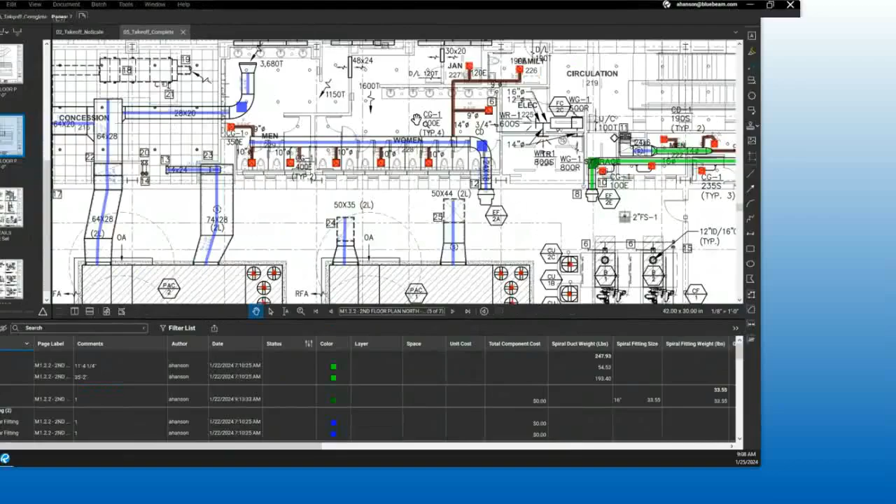Okay, so here is Revu, and this is the final takeoff that we're going to be using today. At a high level, we can see that many custom columns have been set using formulas in order to get weights of different products for our use. We also see a variety of different ductwork since this is an HVAC takeoff. We have rectangular ductwork here, different types for different sizes, also spiral and specialty ductwork. We also are leveraging count tools. We have some diffusers and different types of fans, and we'll go through how to set those up today.

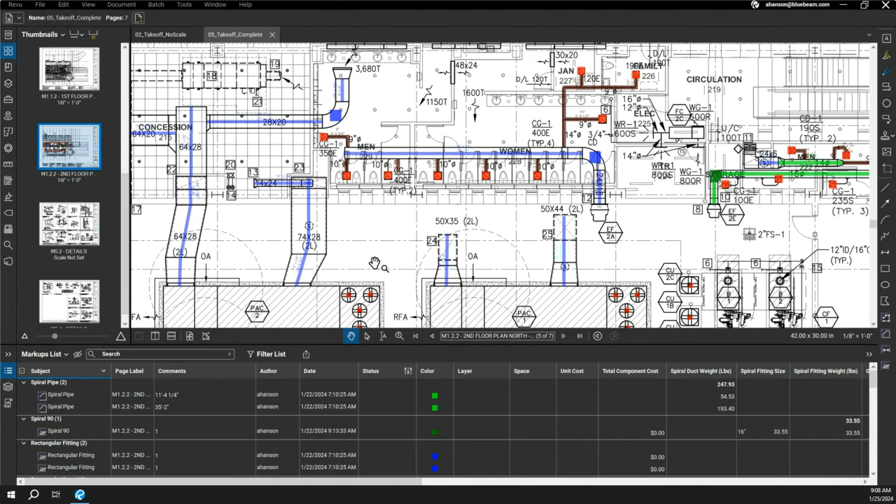So closing out of our final state, I'm going to jump into a blank document that hasn't had its scale set yet. Now I can tell the scale hasn't been set in two different places. Over here, leveraging my thumbnails panel, I can see that scales have been set on some of my documents, but not on the one I have. If you don't see this on your version of Revu next to the thumbnails, there's this little labels button. You can click that and you can toggle the page scale on and off. The other place you can tell that this page has not been set to scale is in the lower right-hand corner, either of which are fine.

Now, before we go through the process of setting the scale, I want to show you a trick that'll help you when snapping things to your PDF itself. If you go up to Tools and go down to Toolbars, I'm going to turn on my status bar.

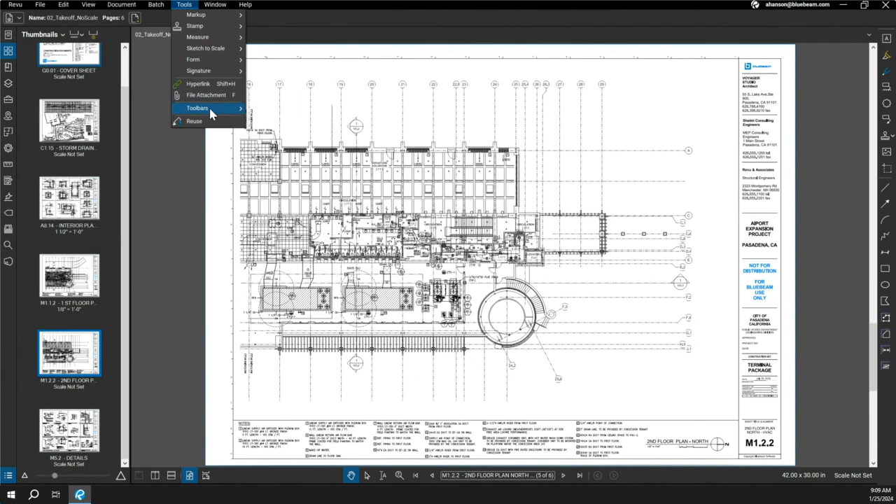The reason I'm turning my status bar on at the very beginning is it's going to allow me to turn on a feature, this third one at the bottom, called Snap to Content. Anytime I click on my content, it'll assure me that I'm snapping to the line that I want instead of clicking close on that PDF.

Now that that's all done, we can set the scale in two different ways. I could select multiple pages over on my left-hand side in the toolbar, right-click and hit Set Scale. Or I can also leverage that piece down in the lower right-hand corner where it says Scale Not Set, click that, and you'll see Apply Scale to Pages pop up.

Here I can choose multiple pages, a page range. I'm going to stick to just this one for right now. And then I have two options here. I have an extensive list of common scales, including metric at the bottom, or I can go over to custom. If I don't have the scale listed in preset, but I know what it is, I can type it in here. I can also use calibrate.

Calibrate is a great way to set a scale if you have a known dimension but don't know the actual scale for the page. It'll prompt you to choose 2 points and then type in the actual dimension, allowing Revu to do the calculations for the scale for you.

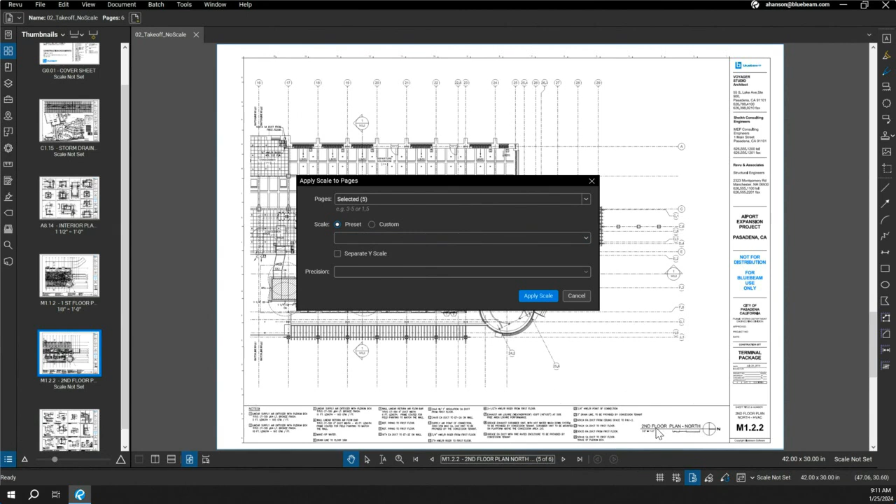So I'm going to go over to preset. Here we can also set a separate Y scale. This would come into play mainly with civil drawings where the horizontal and vertical axis might be different. I can also choose precision. So I know that this page happens to be 1/8 of an inch equals 1 foot, so I'm going to choose that. And I'm going to do this precision, which is really the rounding mechanic, to 1 inch because that'll work for me, and hit apply scale.

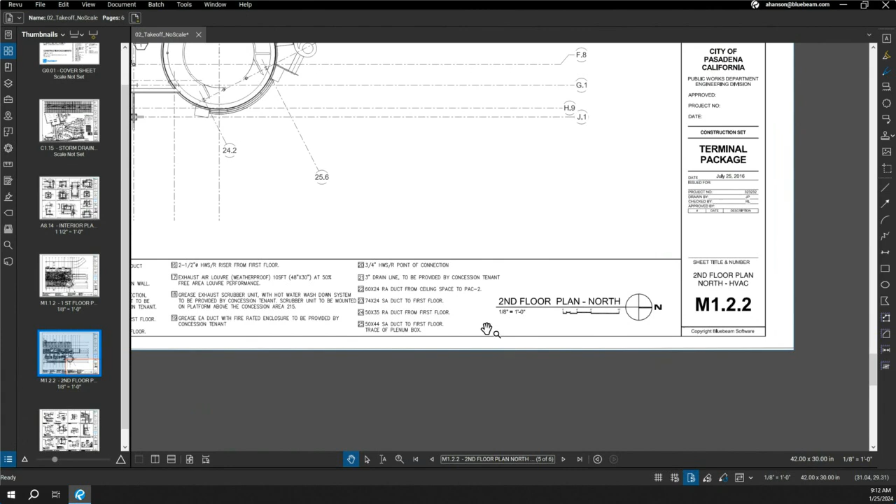So we see that it indeed changed it down here. And because I chose a preset, we always recommend that you verify that. The reason being, although it says the scale on the drawing, this is intended for a particular sheet size. If this page was printed to a sheet size that is larger or smaller and someone clicked scale to fit page, that could not be accurate. Since measurements are so important when doing takeoffs, we want to make sure that's accurate by verifying it.

We can go up to Tools, Measure, and hit Length. I'm going to just come in here, and because I have that snap to content, it'll help me out. I'm going to click this point, come over here. I see that it does show 8 feet, so I know my page is correctly scaled.

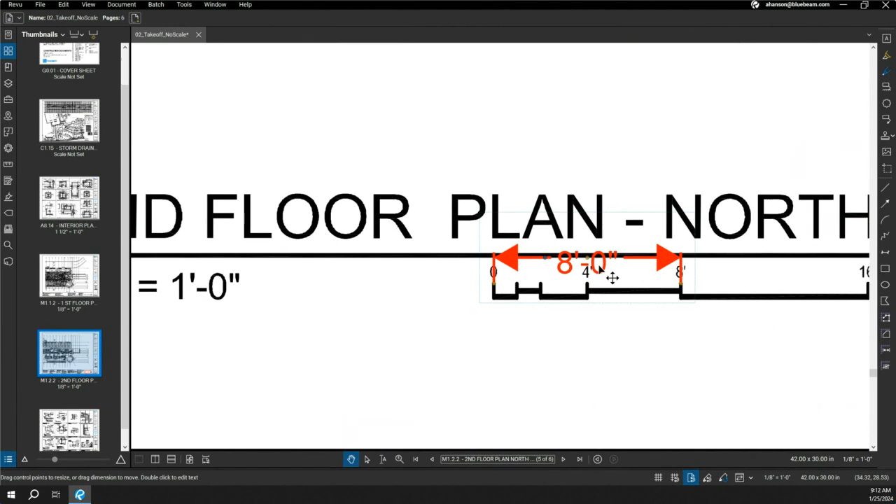So I mentioned viewports. If I have a page similar to this detail document where, yes, the page has been set and it suits the needs of most of these plans, but I have one detail on this plan detail document that is 1 inch equals 1 foot instead of this 1.5 inches equals 1 foot...

So I'm going to use a viewport, which I can access over here in the measurements panel. I'm going to left click to expand that, and hit plus. It's going to ask me to select a region. This is going to be the region that has a separate scale. So I'm going to hit OK, and go ahead and click and drag and release.

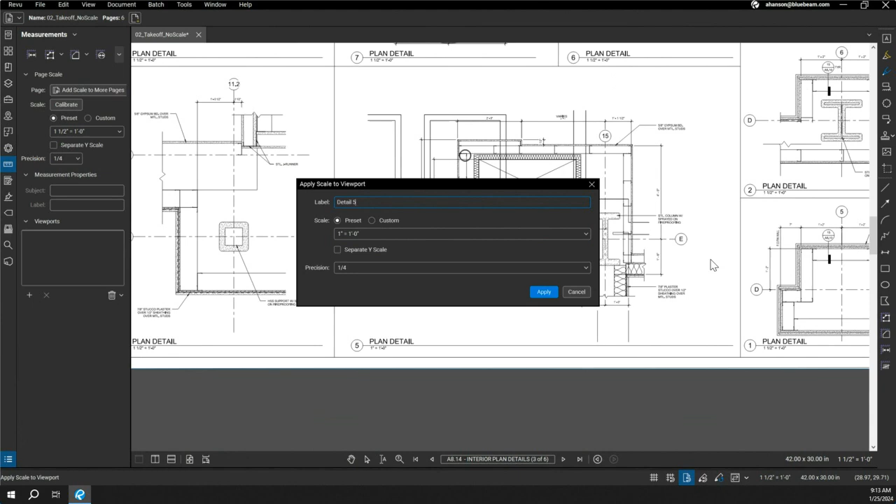Similar to the other scale dialog, I can set my scale. I know that it is going to be 1 inch to 1 foot. I also have the option to type in a title, which I'll make detail 5. This comes in handy because if each of these details had a different scale, it would help me keep track.

So now that I've set that, you can see it in 2 different places. It starts to populate this list of viewports over on the left, as well as turning it blue. In this blue dialog here, we see that it is listed as detail 5, like that label I listed, as well as 1 inch equals 1 foot. Now any measurement I take within this blue area will respect that viewport scale, and any measurement I take outside of that blue area will respect the page scale.

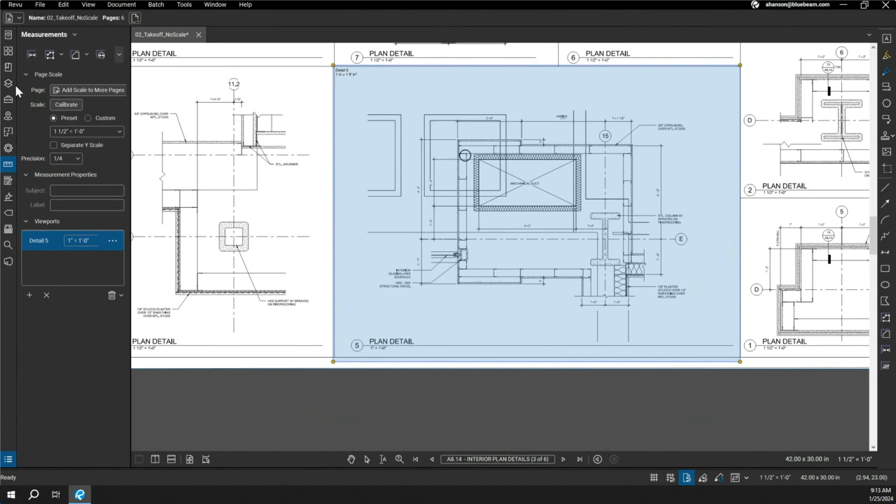So now that I've set my scale, we can jump back into our original sheet and start doing our takeoff. At its very simple start, we can just go ahead and go Tools, Measure, and Length.

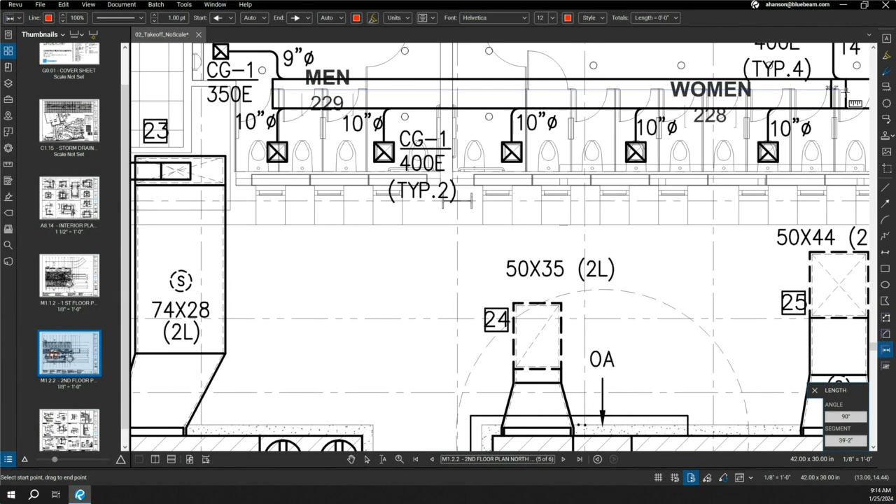I'm going to click in on this duct, and you'll notice my cursor can be moved in any direction. This might be good, but it might be bad in case I'm trying to do a straight line. If I hold down Shift, you'll see my cursor snaps to the closest 45-degree angle, ensuring I'm taking the actual straight line I want. So I'll click that other spot to make my takeoff, and do one more, holding Shift again and reaching to the other line. That gets me started on a takeoff.

However, the real power in estimations in Revu is going to be in building out standardized tools and custom columns so that you can get additional information. All of those custom columns live in the markups list.

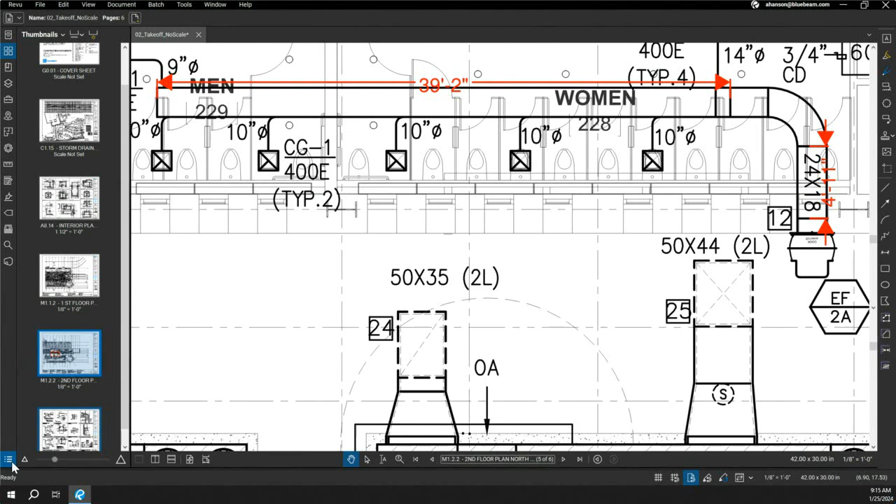If we go to the lower left-hand corner, you'll see an icon with 3 dots and 3 lines. If I click on that, you'll see that the markups I've placed have had their information captured here. We have a handful of built-in columns, such as subject, which is a way you can group your markups for ease of filtering and sorting, as well as page label, comment, which is the actual measurements, author, date, etc. Now, I could just do my estimation with these basic tools, but we want to take it to the next level by making it repeatable.

One of the things I'd like to show you first is the profile. Both custom columns and custom tools live in the profile, so I think it's the best place to start. The profile is really the look and feel of your layout, exposing any tools that are useful for your individual needs. We can find profiles in the upper left-hand corner.

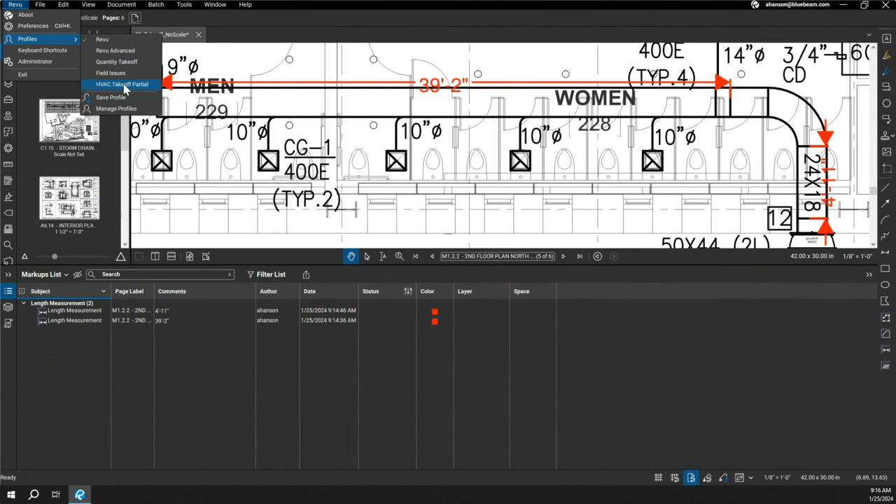If I click on Revu, go to Profiles, you'll see a list here. These first top 4 are built into the software, and you can use them. I have one that I built out, started for today's use. I'm going to jump over to Quantity Takeoff and look at how my interface changes.

It's going to have that markups list at the bottom. I'll pull it up so you can see it a little bit better. You see we have some additional built-in columns that have been shared here. If I built out custom columns, they would be added as well.

Now, the reason this is important: as we can see in this length column, different from the original one, length is going to have a total because it's a measurement style column. We also see area, volume, depth, etc. So we can change all of our columns down here. On the right-hand side, the measurement toolbar has been added for ease of use, and on the left-hand side, that measurement access panel has been pulled out.

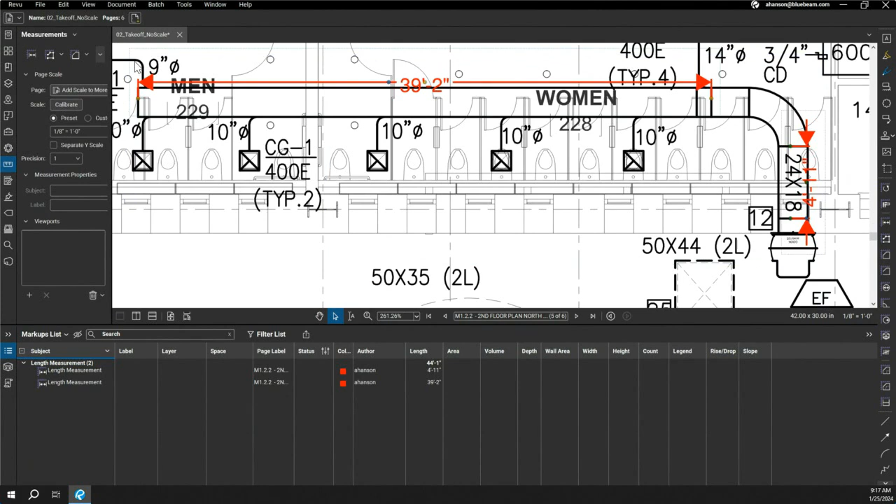Now what I want to do is show you how to set up some columns. I'm going to delete these markups, and we'll start from scratch using that profile I mentioned before. Anytime you build your own profile, you can use the base of one of the built-in ones and start from there.

Here, I cleared out a lot of the columns because in this particular takeoff, we have mostly custom columns that rely on formulas and other metadata. So we're going to build out custom columns here.

The first step is to go to Markups List, Columns, and go to Manage Columns. This is the list of all the built-in options you can choose from, but I'm going to go over to custom columns. What we're going to do is make some tools that are particular to items such as diffusers and fans, and I'm interested in a unit cost and the total cost of those units.

So I'm going to hit Add and make a unit cost column. There are different types of columns you can choose from: checkmark, choice, date, formula, number. We're going to choose number, and under format, I'm going to make it currency. It defaults to dollars, which is okay for me. The next one I'm going to make is total component cost.

Now this total component cost is going to be a formula. You'll see that once I choose formula, I get an expression bar. Here I can just start typing and it'll give me some prompts as to what I want. I mentioned I wanted a count, so I'm going to start typing count. It gives me this list. I just double click and it will add it to my expression.

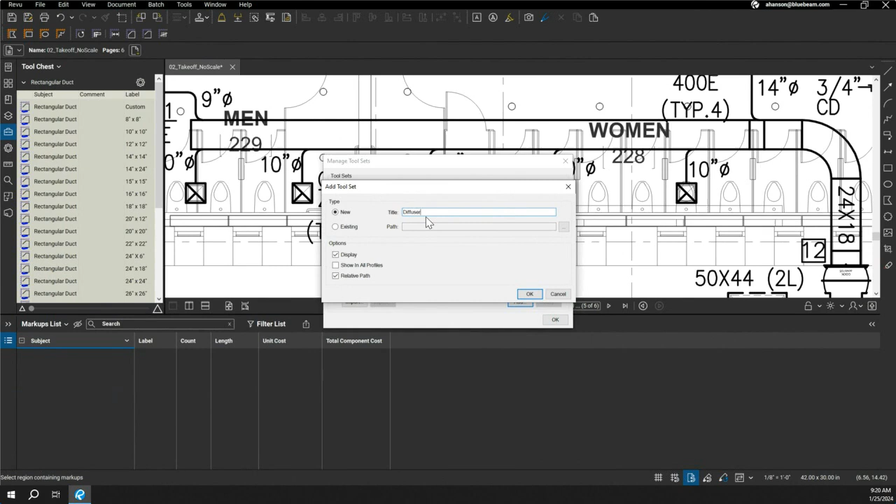The first step is to go ahead and click on that tool chest and go down to Manage Tool Sets. I'm going to go ahead and hit Add, and I'm going to call it Diffusers and Fans, and hit OK. It's going to go ahead and prompt me a place to save it. The standard default location is fine by me, but you can choose a different location if you want.

And I'm going to select this and just go ahead and toggle this up so that it is at the top of my tool chest for you to see it easily. Going to hit OK, and now that I have my custom column and my tool chest set up, the next thing we want to do is build those markups.

So I mentioned I wanted to use a count. I can either use it from this toolbar that I have here, or I can go up to Tools, Measure, and hit Count. I'm going to just place it on my drawing and escape out. So we see it has been added down here, and what I want to do is select it.

It turns blue, and I'm going to change the properties to suit my needs. So when selected, the Properties panel comes up here, the Properties toolbar. It is dynamic, meaning depending on what type of markup I have selected, these options will change.

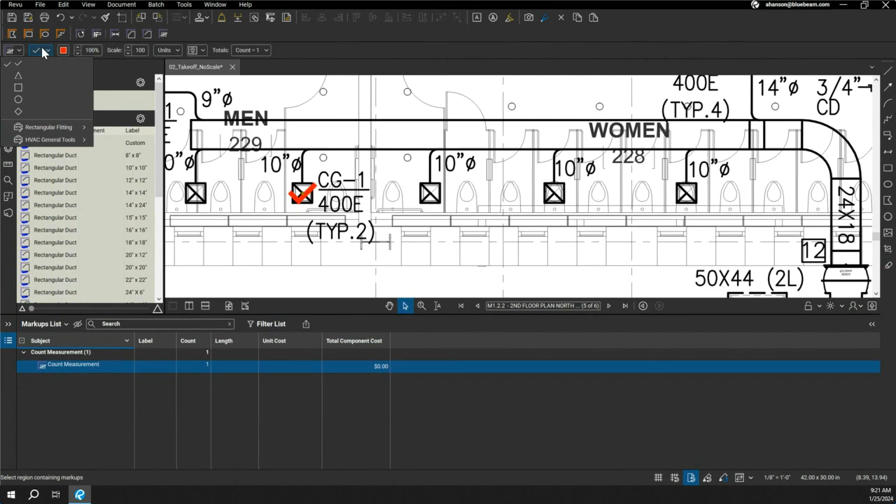With a count, I can go ahead and change the style. I want to change the opacity so it's not quite as bold, and I'm also going to change the size so it's a little bit smaller.

Another thing I can change here are subject, label, and layer. I'm not going to change this here. I'm going to do that in the markups list because we have a couple other items we want to add. So in addition to changing custom column information here, all of these items can be found in the properties panel if you so wish. I think this is a little bit easier for our purposes, so we're going to do that down here in the markups list.

So to change the subject, so I kind of group them together, I just double click and highlight, and I'm going to make this diffuser style 1, and I'm going to give it a unit cost. We're going to make this $27, and you see it go ahead and will multiply over into the total component cost.

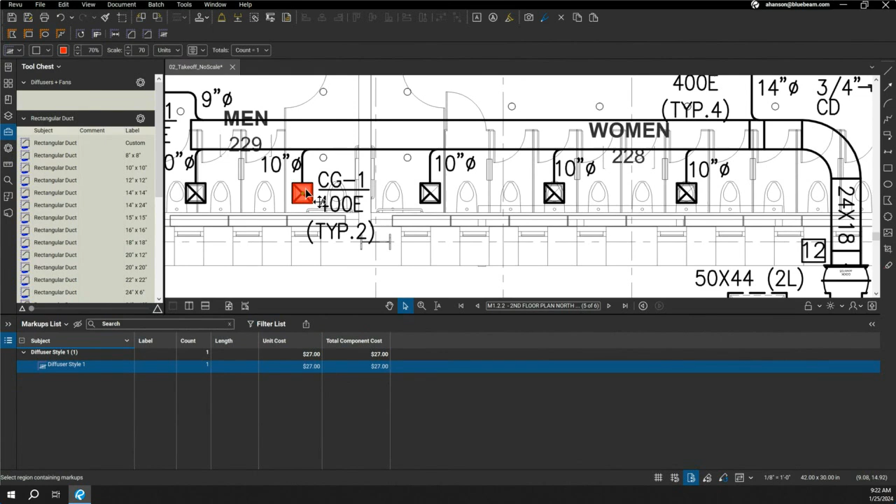Since I've built out my first tool, I'm going to use that as the base of my other tools. I'll select it when it's highlighted, hit Control C to copy it, click aside, hit Control V, and I get a second tool.

Here I'm going to double click in, and I'm going to make this diffuser style 2. Now that I have diffuser style 2, I'm going to double click and change the price to $39. So I want to build out some fans.

I'm going to click that first one, hit Control C, click out, Control V, and instead of just changing the price, I also want to go up to this properties toolbar here and change the look. I'll make it a triangle. I will come down here, take out diffuser, type fan, and change the price accordingly. We will make this one $34, and I'll make one more fan.

I'll select that, Control C, click, Control V, and I will make this fan style 2. And I will change this price as well.

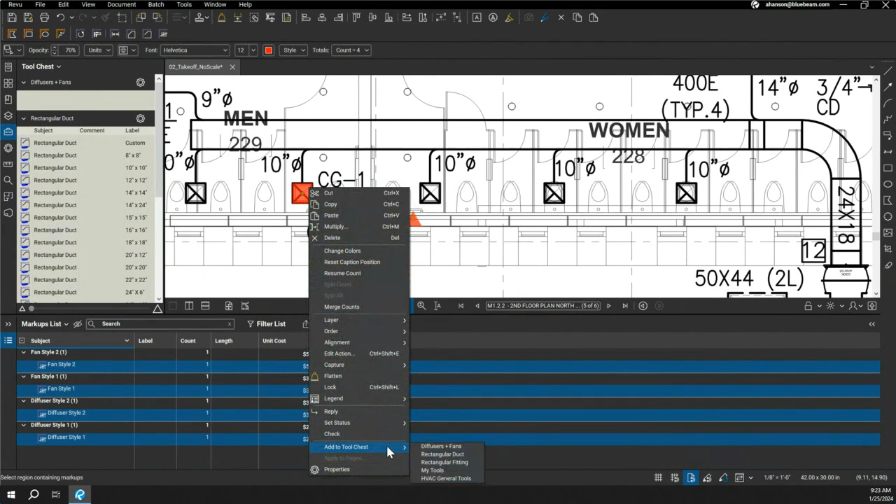Now that I have the tools that I want ready to go, all I have to do is click and drag to select them all, and right click on one of them to add to tool chest. Because I already took the time to set up my tool set, I can choose that diffusers and fans, and it automatically adds them up here.

Now, I just use this sheet as a way to build these out, so I can go ahead and delete those. And then as I place from here, I can just go ahead and do my takeoff.

Now, although these symbols are here and when I hover it will show me the subject information, it's a little bit more difficult to navigate. So if I go to the settings and click and choose detail, I can see that more grid option where it says subject, and if I had established a label, it would show there.

Now, in order to have these for repeat use in the future and share with my team, I want to do a couple things to save. I'm going to go up to settings and hit save, which will just save the work I've done to make sure it's fine. And lastly, go to Revu and profiles, and I'm going to go ahead and hit save profile.

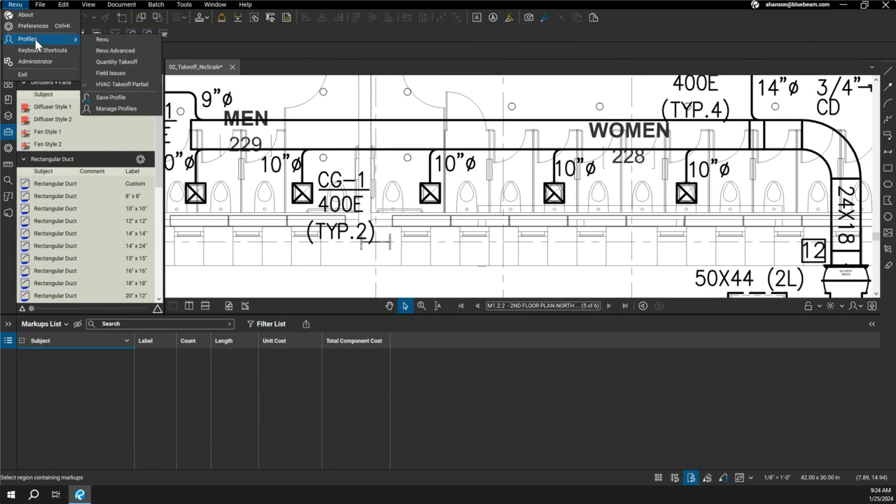And if I want to share that profile with my team, I can go to manage profiles, click on the profile I want, and export. Before you export, you want to make sure you have that include dependencies checked. That'll pull in all of the custom column information and your tools so that there's a single file that your team will have to download to benefit from all of the work you've put in today.

Now that we've gone through a little bit of setup, I'm going to hand it back over to David to talk about those poll results.

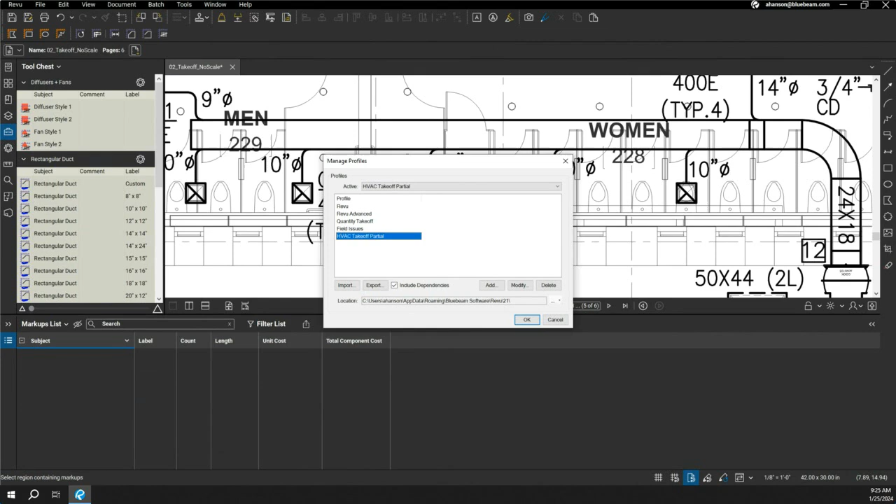Great, thanks very much, Ash. I love the tool chest personally, I used it a lot in my previous role. So for those of you out there, as Ash said, if you're working on a team, the tool chest is a great way for you guys to have consistency in your work and also be able to present a kind of professional estimate internally, but also to clients. So yeah, thanks again for going through that, Ash.

Before we go over to Harry, we did have a poll that popped up at the beginning when you first came into the webinar, so we want to take a minute right now and look at the results. The question we asked was, which Bluebeam Revu features do you rely upon for your takeoff process? You can see the results up here: customized measurement tools at 83.8%, Legends 32%, Studio Sessions 15%, Custom Columns 18%.

So Harry, you're up next. I wanted to ask you, when you see these poll results, is there anything that surprises you, jumps out at you?

I think the use of custom columns only being less than 20% surprises me. These are really powerful tools that are going to help you leverage either your takeoffs in Revu or when you export out to something like Excel. So that's small—it just means data is clearly a big deal when it comes to bids and takeoffs. That's at least what sticks out to me. Yeah, and I was struck by it too. It's cool to see some people using Studio Sessions.

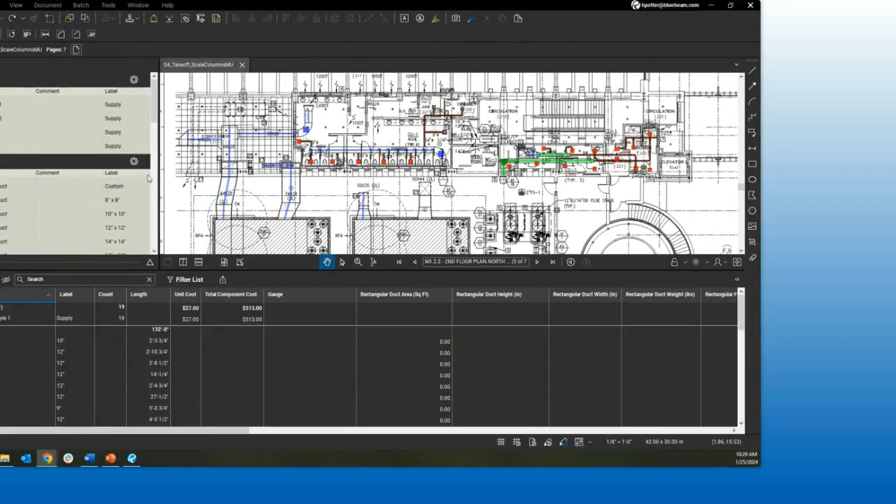This is going to be the same drawing that Ash had, and we're going to hit the ground running, taking a look at the markups list. So Ash talked about how we can build that out, how we can create those custom columns. And the custom columns here are really designed for two different uses.

So we have some custom columns here that Ash showed setting up that provide a unit cost and a component cost, and effectively allow us to calculate with our measurements. Revu is behaving a little incorrectly today - it's my mouse, back on track. So we have our unit cost multiplied by the number of count items to create a total cost for physical units.

But some of this other ductwork here is really being used and calculated with some of these more complex custom columns to calculate duct weight. And this requires columns that are going to have some rough calculations and approximations, as well as multiplying by formulas to calculate the ultimate weight of custom-made ducts.

Now, ultimately, you may not be involved in the HVAC world at all, but you're likely going to have various different processes that you're working with to calculate things. It could be calculating overage when looking at square footage of carpet. You could be factoring in labor, or factoring in waste of material when working with baseboards. Each of these is going to require different formulas and calculations, and the markups list is going to allow us to do that.

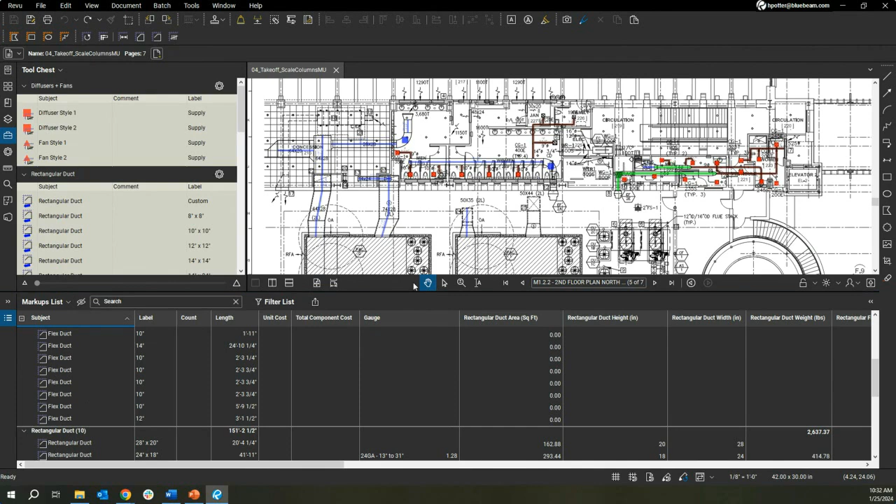So I'm going to finish up placing another one of these duct items right here. This is going to be a 50 by 44 rectangular duct. I'm just going to click on this in my tool chest.

When using my measurement tools in Revu, the nice thing is that a lot of the different measurement tools, be it poly length, area, or volume, operate in very similar ways. All of them have this little blue box on my cursor that's snapping to content, which makes it easier to draw.

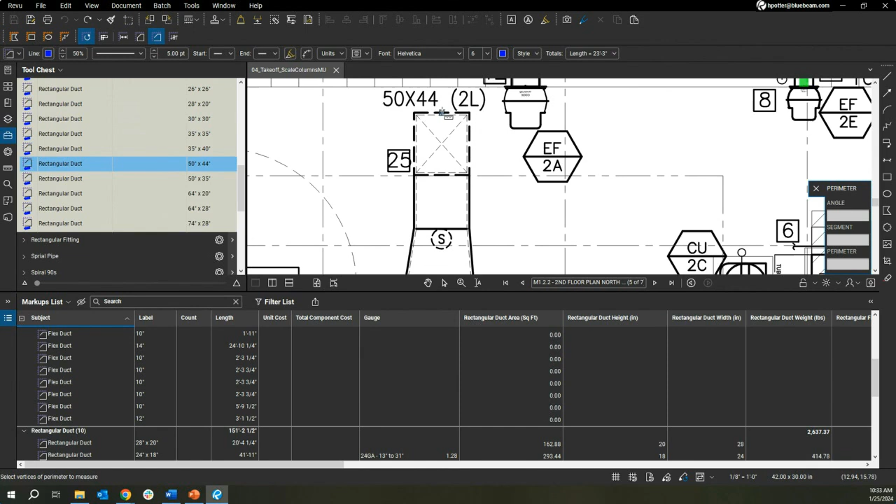So to place this length measurement, in this case the poly length, if I wanted to measure changes in this duct, I could.

I'm just going to click, and then place my click down here at the bottom to measure this. Little trick though, if I hold down my shift key, it locks me into orthogonal directions, letting me draw a nice clean straight line. Then I click at the end. It's going to prompt me to keep placing line segments, but since this is a nice straight one, I can just hit enter and end this.

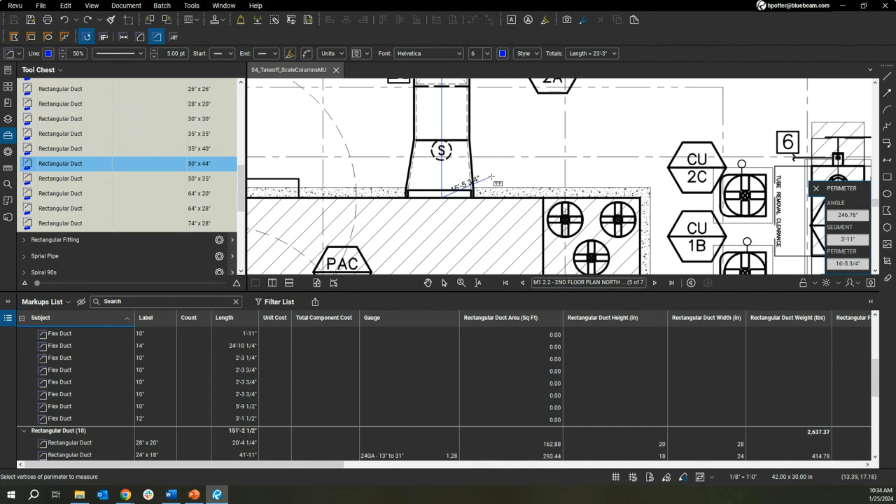A little trick for you: if you end up accidentally placing multiple line segments that you don't need—this could be calculating anything from ductwork to egress—just hit your backspace key and it will remove that line segment. Then I'll hit enter, and now we have this calculation right here.

And we'll notice it pops up on my markups list. It's going to take the length I drew on my drawing and use the calculations, this approximation of gauge, taking my square footage and multiplying and calculating with my height and width to give me this duct weight.

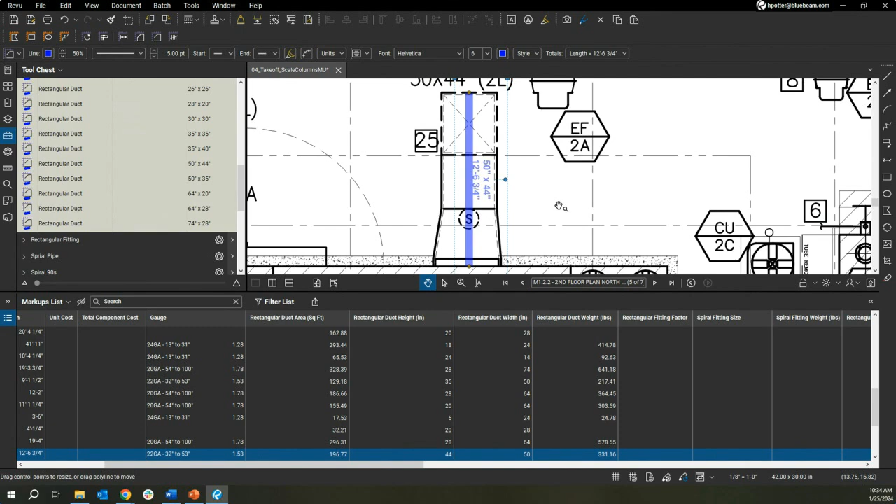And again, we can keep using this as we're calculating and measuring different ductwork here to ultimately get a total weight of all the ductwork, which we'll use to create the bid sheet at the end. I'll showcase that data and that export in just a little bit.

So that is our quick length measurement tool there. But what if I want to count some items here?

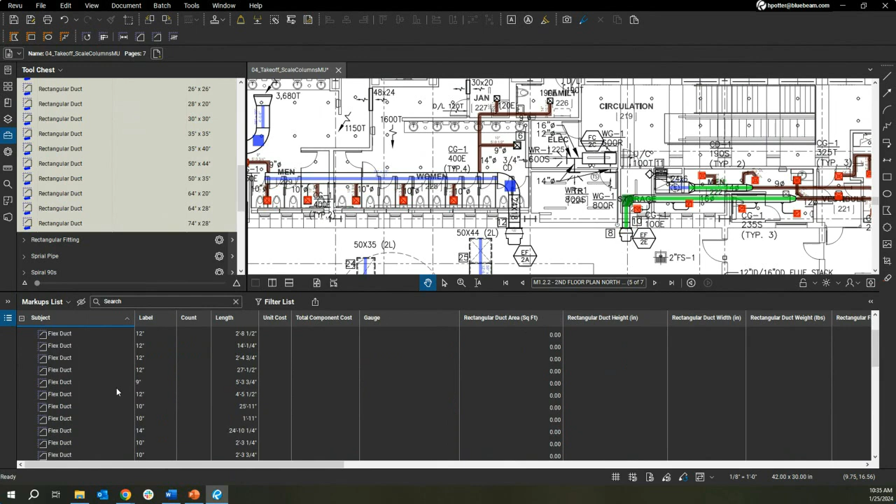So Ash showed these diffusers, and what if I already have some counted here but I realize I've missed a few right here. Now, if I want to continue a count measurement, it can be tempting to just grab the tool from my tool chest and keep using it. But the nice thing with a count measurement is it's one line item.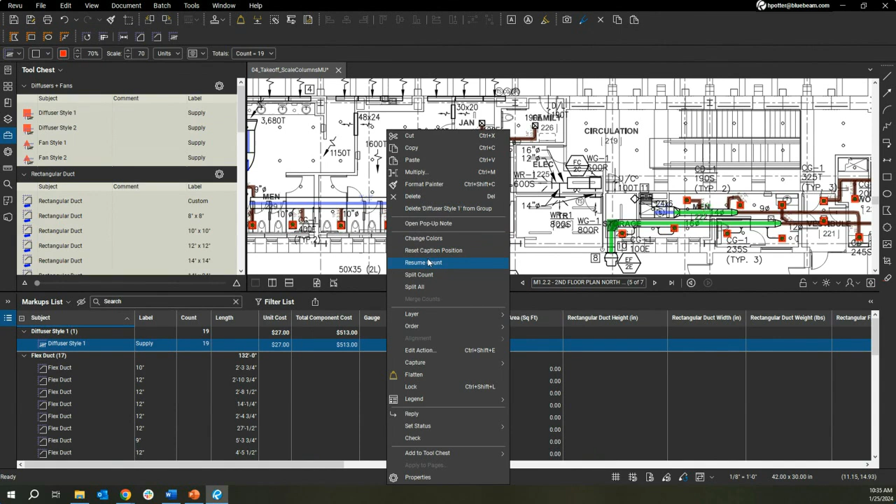So it keeps my markups list nice and clean with one line item. If you want to continue a count you've already started, it's really easy—just right click on an existing item, and right towards the middle we have this resume count option. I can grab resume count and continue that count from here.

So I can just come in and click those items that I want. And if you keep an eye on this, when I'm done, it updates my count and updates my total cost accordingly. So that's all well and good—I had a couple quick items that I wanted to count right there.

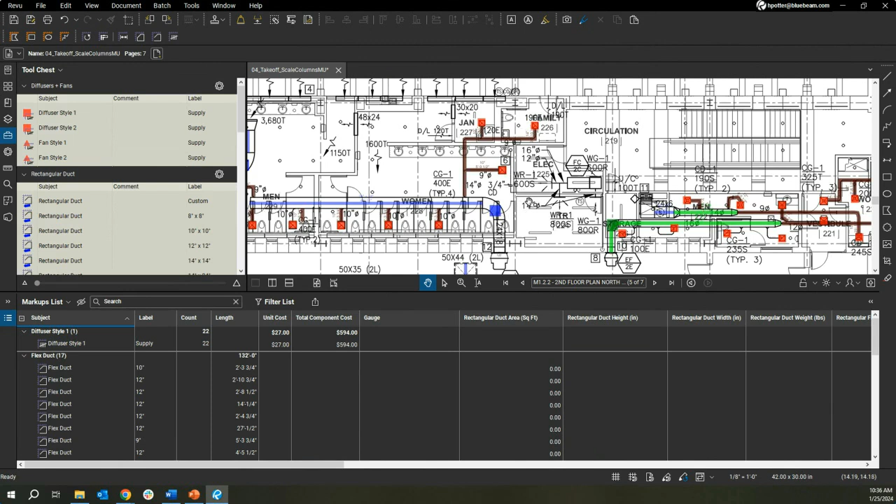But what if I have something like these two different fan items on my drawing? Again, you may not be dealing with fans or ductwork, but we see this everywhere, from electrical boxes to interior doors—counting is a big deal in takeoffs. If you're dealing with one sheet, that's one thing, but if you're dealing with an entire building, that can be hundreds or thousands of items.

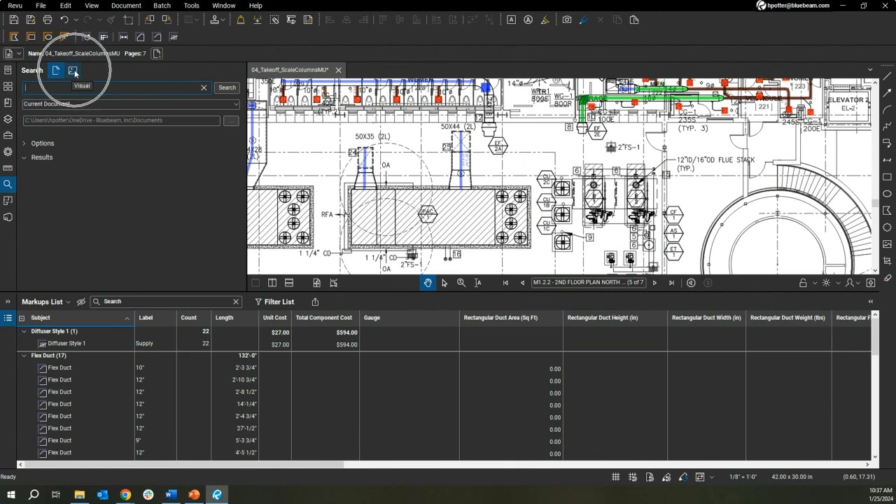So how do we make this work a little bit more efficiently for us? The nice thing is we have a tool called Visual Search. Now, Visual Search is in here in this search panel, the little magnifying glass right over here. Some of you may have seen that you can do a text-based search, which is awesome. But we can take it a step further with Visual Search right here.

What Visual Search allows us to do is click on this Get Rectangle and define what we're looking for. Then it's going to search everywhere in the defined location for us and be able to do it really nicely, quick and efficient. So let's start with this fan type right over here.

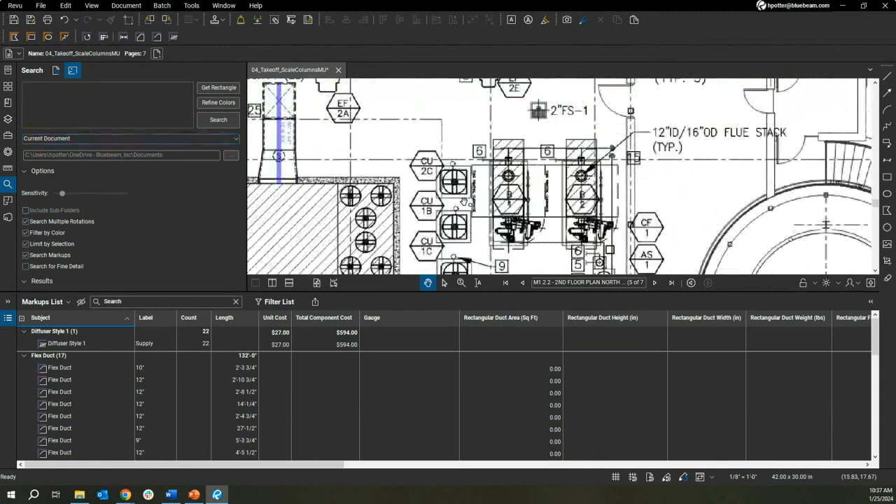The first thing I'm going to do is click on my Get Rectangle, and it's going to turn my cursor into a little crosshair. So I'm just going to click and drag right here over that icon. We're going to see it gives me this image here, sort of a preview of what I'm searching for.

I can then define where I'm looking. The default is going to be the current document. I'm going to stick to just this page right here because I know there's only these fans on this page. But if we wanted to look at an entire document or even an entire folder, we could do so right here.

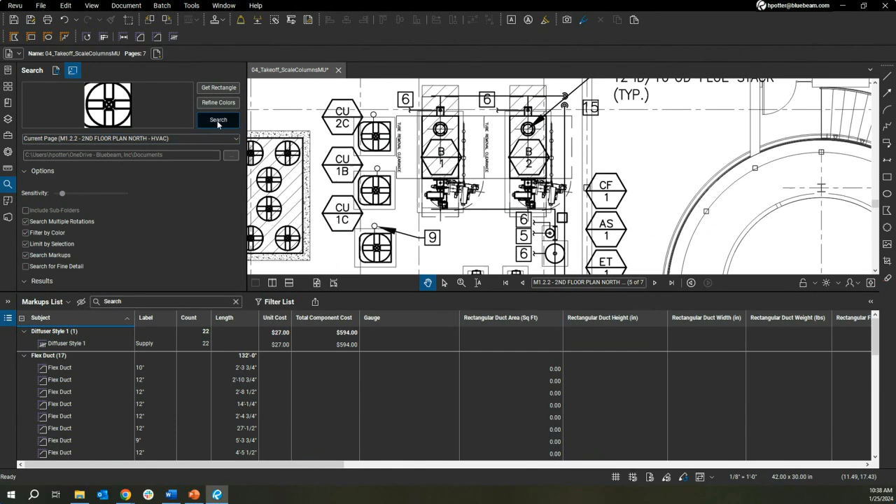I then have some options for fine-tuning my search here, but we're just going to search and take a peek at this. We're going to see it's searching here, and we're going to see it found 3 items.

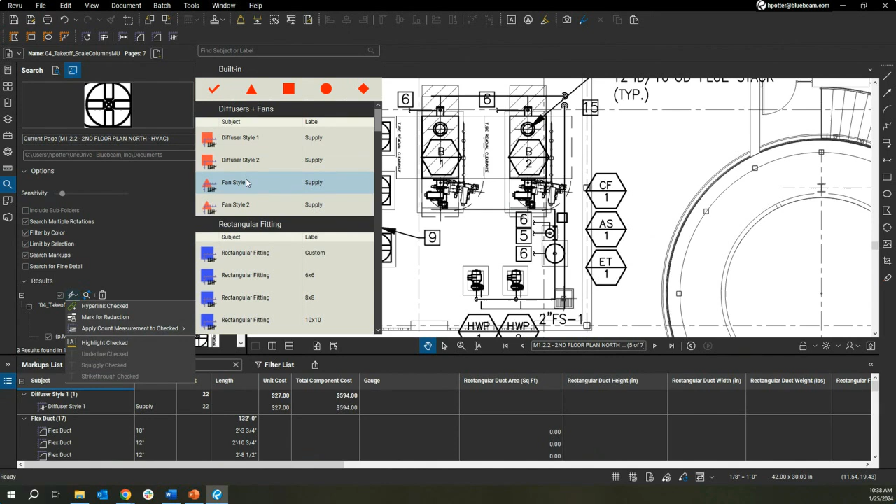So what I can do nice, quickly, and easily is click on this Select All, and then click on this My Options for this checkbox, I can come in and apply a count measurement to checked. You'll notice I can use some of the default count measurements, but I've already created these, set up for me, ready to go. So I already have data associated with these that were created.

So I can just click on this fan style 1 that I have, and we're going to see it populates in my markups list with that count and the unit cost and the total cost already built out. So if I have the tools already set up, I can quickly and easily use Visual Search to count these items and create the calculations for me.

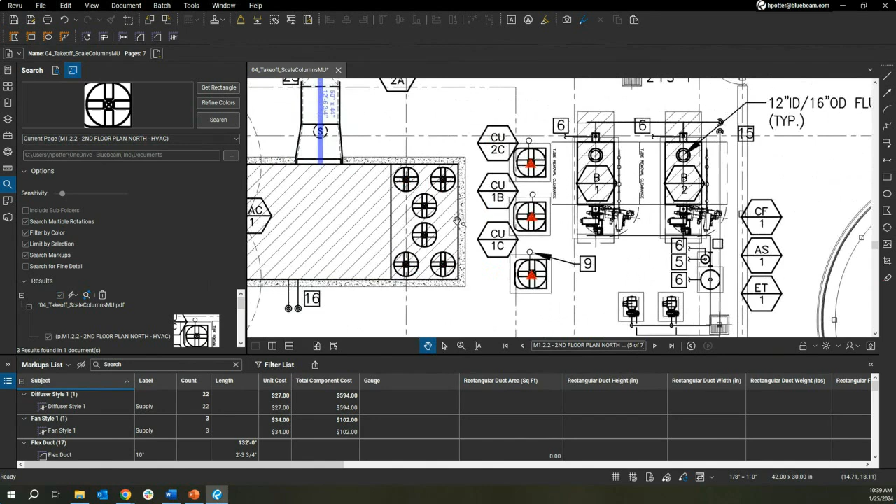Carrying through, I'm going to do that one more time for you. Again, I'm going to search the second fan type. I'm going to go to Get Rectangle again, click and drag around that icon, and search here as well. It's going to search the parameters and find what we're looking for. And I can select all of these items and apply that fan style 2 right there.

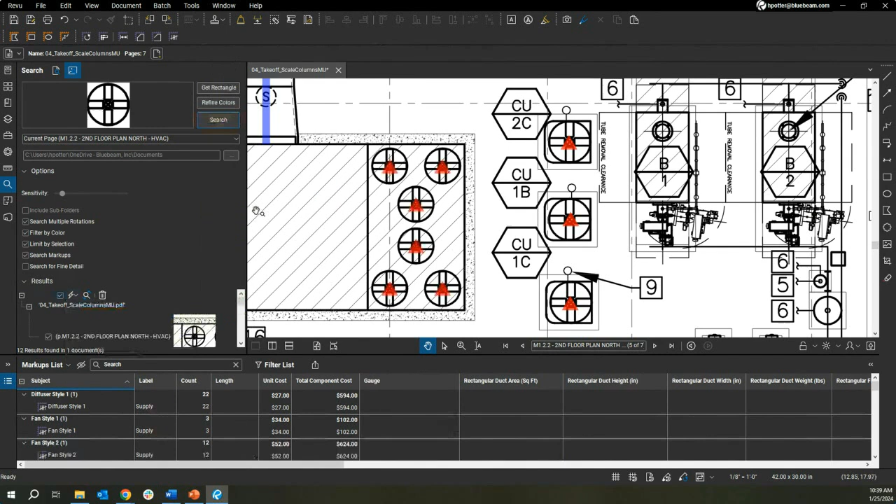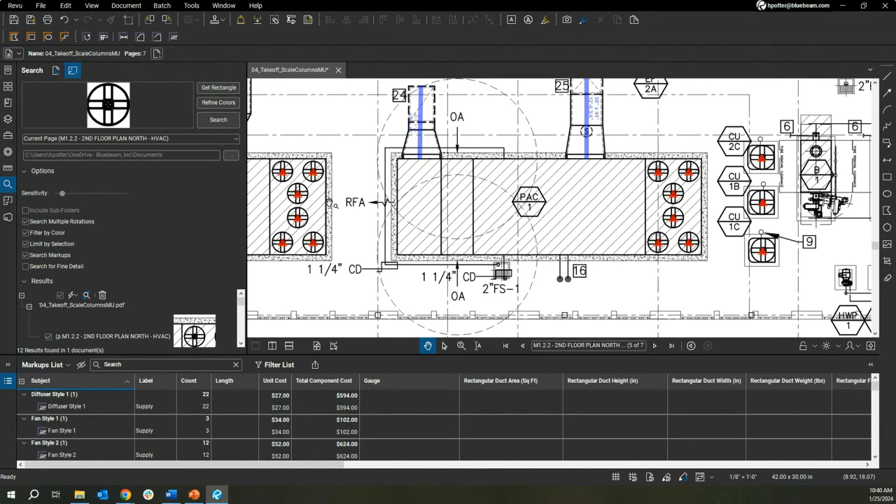We're going to see it counts them for me, and it even counts ones I wasn't even looking at the time. Now, one thing I do like to note, if you're doing the Visual Search, what can be most helpful is to ensure that you check anything that's done automatically in the software manually, and this is going to depend a little bit on the quality of the drawings you have. So the better the quality of the drawing, the more accurate the visual search is going to be. It might require a little bit of fine tuning here, but it allows you to really quickly and easily count items very quickly across a wide range of drawings. It can save you a nice amount of time.

So I have a number of lengths, counts, items here on my drawing, and I have my markups list built out. But as we saw in the poll, a lot of you are using legends, but it was still only about 30% of you. So what are legends and how can they help us?

Well, legends are really a nice, quick visual way to see ongoing totals and data from your drawing. The markups list is awesome, it's powerful, it has a ton of data in here, but unfortunately it can get a little convoluted, particularly if you have a lot of these built out custom columns like I have here. And if you notice, a lot of the measurements that I have here, they don't fill up every column, they just fill up a few certain ones. So it'd be great if we had a nice visual way to see this on the drawing that would give us also rolling totals.

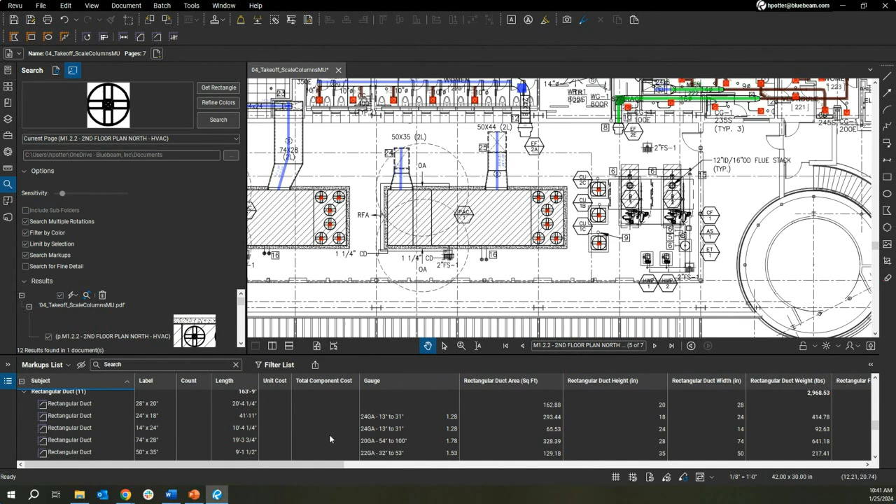And legends can do exactly that. So I'm going to come up here, a bit away from what else is on the drawing, and create a legend and show you how that works.

Now we have two different ways to create a legend on the drawing. We can either create a legend from individual tools, so I can right click on a particular tool and go to legend and create new legend. But the nice thing is if we have a tool set set up, it's actually even better to create them from a tool set. So if I click on this little gear icon next to a particular tool set, I can go down here to legend and go to this create new legend.

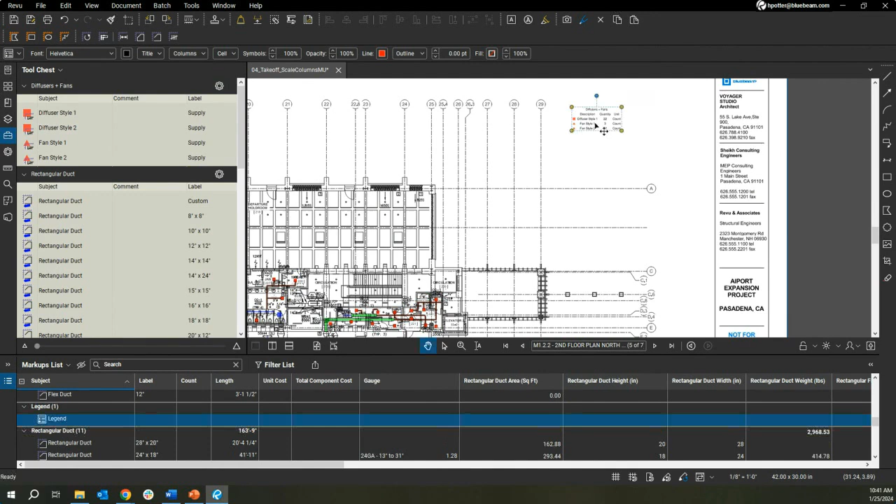Now click on create new legend and we're going to see it populates that for me and I can just place that on my drawing. So this legend, the nice thing with creating it from the tool set is it already gives me the name of it, the name from the tool set itself. And it gives me a description, a quantity, and what the unit of that particular item is.

Now I could create two separate legends here. So I can create a new one with these rectangular ductwork if I wanted to have two different items. Or instead, I could add this to the existing legend and have one built out legend here. And I can easily just delete that extra one that I don't need anymore because I have all of the data that I want in one legend.

And if I were to come in and add more items, say for example a few more diffusers here, in the middle, it updates that count there for me. And I might have multiple different line items in my markups list, but it gives me the nice total of all this right here in the legend.

Now I can also change a lot of the properties of this legend as well. So I can come in here and change which page this is sourcing from. The default will be just the current page, but I could have it grabbing data from the entire document. I can come over and change the title here. So right now it's diffusers and fans, but I could call this instead HVAC Takeoff, and it's going to update that for me. I can pick which columns this is taking into account.

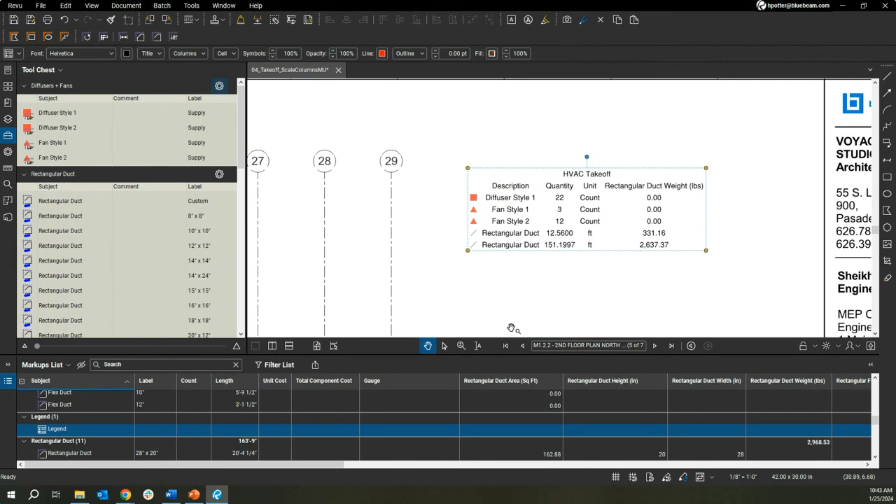So I could include, for example, the total rectangular duct weight, and I could see that for each of my rectangular ducts. Maybe I want to see the different types of rectangular ducts that I have here, so maybe I want to include label as well, so I can include that. And we're going to see, instead of just seeing the two different types of rectangular ducts I had, now it splits it out and shows me each different type of that rectangular ductwork. So I have a lot of flexibility in terms of how I am seeing the data in this legend.

And again, this sort of gives me a nice visual indicator as I'm building this takeoff up, what that looks like. So the legend is one type of data output, but ultimately we want to use this to create a bid. So how do we take this information from our drawing and put it in a place that's easy to calculate, take into account those costs, and ultimately create a bid sheet at the end?

Well, in our markups list, right down here at the bottom, we have this summary button. Now we have four different types of summaries here, but the one we're going to focus on today is CSV summary. This is going to allow us to take our data and create an Excel file from there nicely, quickly, and easily. So I'm going to click on this CSV summary button right here. We're going to see it's going to pop open this summary dialog right here, and there's a lot of flexibility we have.

So under columns, this allows us to pick which columns we want included in our summary. And by default, it's going to have all of the columns that we currently have turned on, and I can toggle them on and off by clicking on that checkbox. I can also filter and sort certain things. So maybe I want to create a bid sheet of exclusively fan styles or just particular ductwork. I can filter and sort items within there.

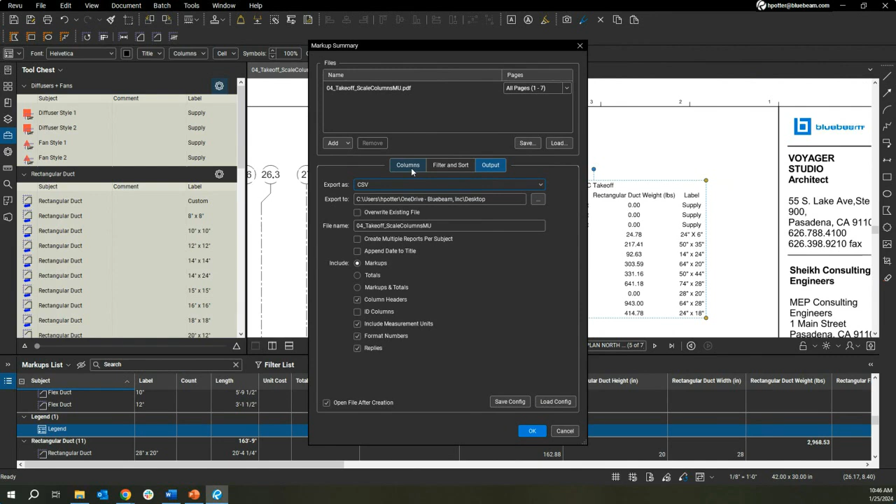Now, the nice thing here in the markup summary is once I find myself regularly doing certain bids, that's going to be really common. If you're working on, for example, this HVAC takeoff, it's going to be a pretty similar output every time. The calculation is going to be different, the plans are going to be different, but the outputs are going to be similar. What I can do is tweak the columns and the filtering that I like, tweak the naming, and create a configuration file.

So I don't need to mess with this every time. Instead, I can just load a configuration like I've created here. It has all sorts of columns turned on and off and tweaked as I like. And I can hit OK, and it's going to spin up an Excel file for me.

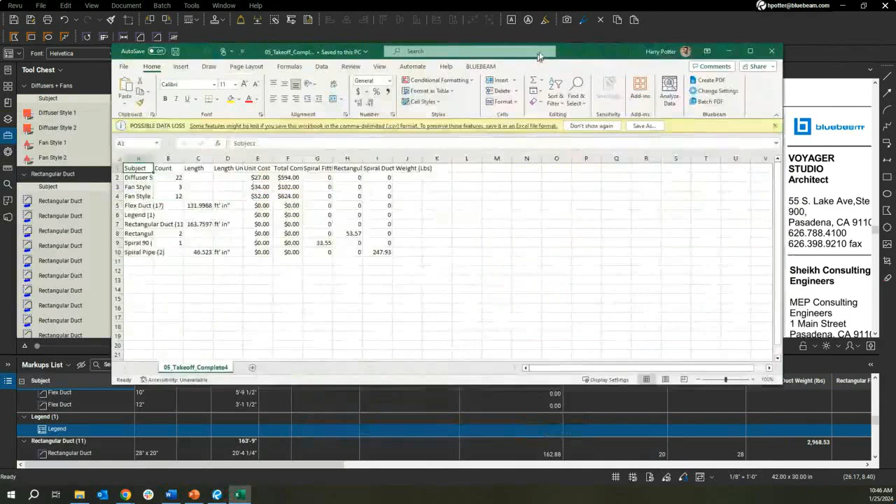And I can then take this file that's going to get built out in Excel, and I can take the data. Let me just pull this over for you. I can include some extra calculations, some price calculations using the weights and such like that, and output that there.

One little trick in Excel before we finish up, if I want to quickly and easily see all the data here, because right now it's a little shrunk. I highlight everything, double click there, and we can see all this information.

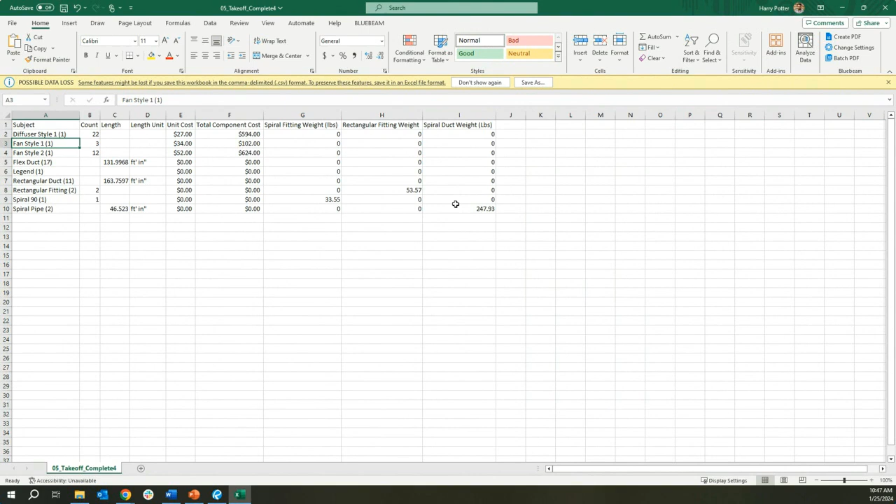I can see the counts, the cost of these particular items, and I can see the weights here that I can then use to create an ultimate calculation in Excel, creating a total using calculations from both Revu and Excel, to ultimately create that finalized bid sheet that I can submit and hopefully win that project.

So that was a quick crash course, but we hope that you were able to take away some really useful items and some really awesome insights here as well.

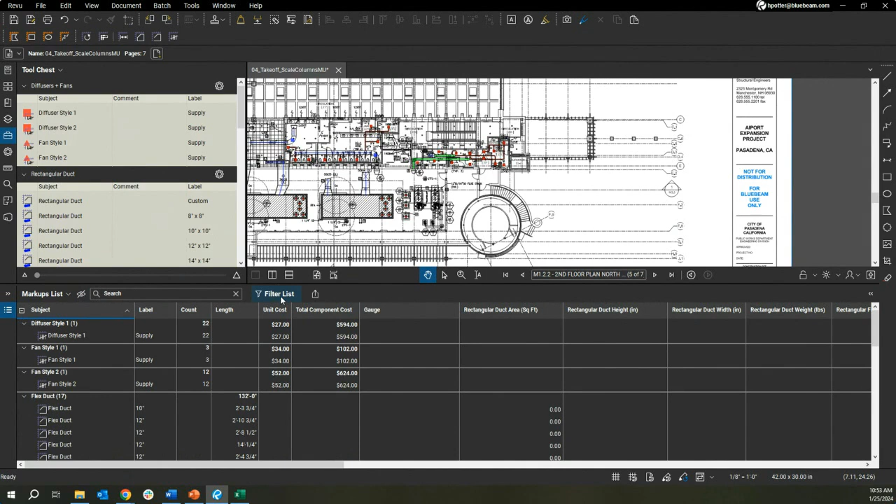Yeah, this is a great question, David, and one that does come up a bunch. The nice thing is we do have a couple different ways to do that. If I come down to my markups list, this little eye icon right here is going to allow me to hide all my markups. It's going to clear the markups out from my drawing and from my markups list, and hide them away. Another way, if I want to just ignore certain items, I have this filter list. Maybe I want to hide everything but a particular type of markup. Same thing, I can filter out everything but certain items, or hide them all except for one item. So the markups list is going to be your lifeline for doing that.

Great, Harry. And while you stopped sharing your screen, I was like, that's a great opportunity to answer another question here. We had a couple of questions about measuring arcs or irregular shapes. What's the best way to do that? I'm picturing someone maybe measuring a curved line and clicking about 100 times along that semicircle. Are there easier ways to do that?

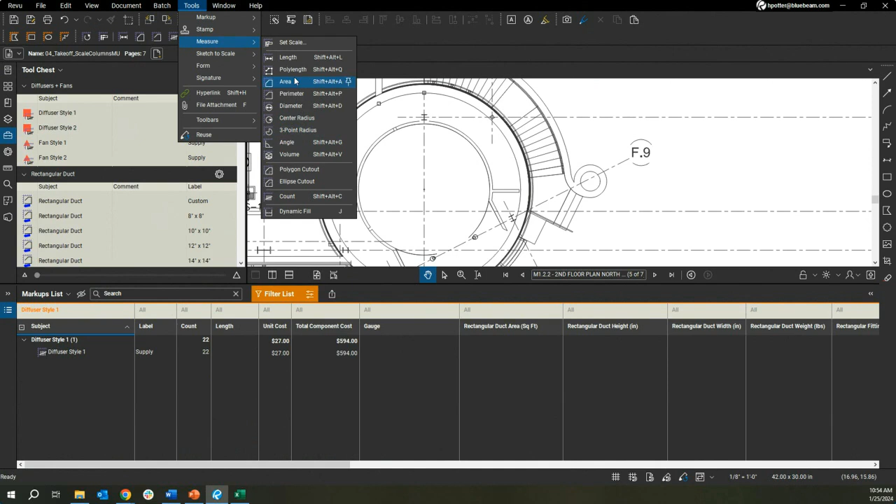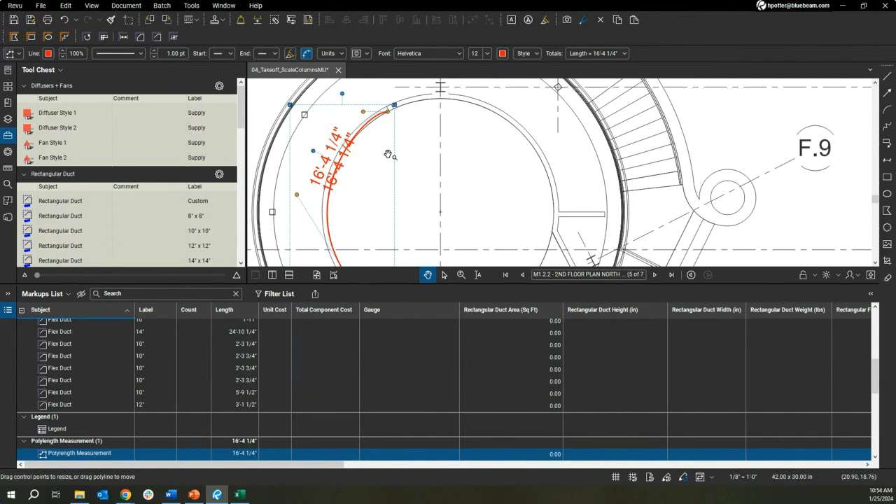So there's a couple different ways, let me pop back and we can show that. I have some curves here as well, so we have a couple different ways to do that. If I want to just measure the quick arc length here, up in Tools and Measure. If we have a nice circle, we can use this 3-point radius tool. But if we have an arc that's not super great, we can use our poly length tool, and basically adjust this, convert to arc, pop this out, and match that from there. That's one way. It's a little clunky, but it can get the job done in terms of measuring those arcs.

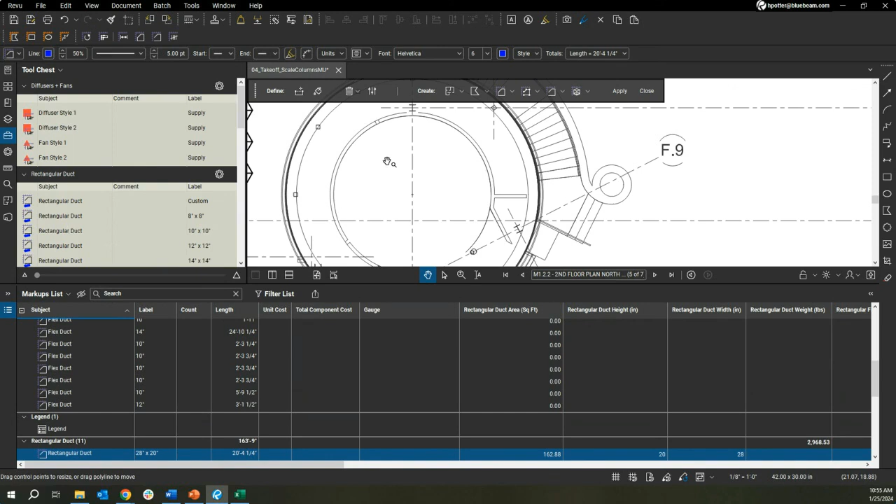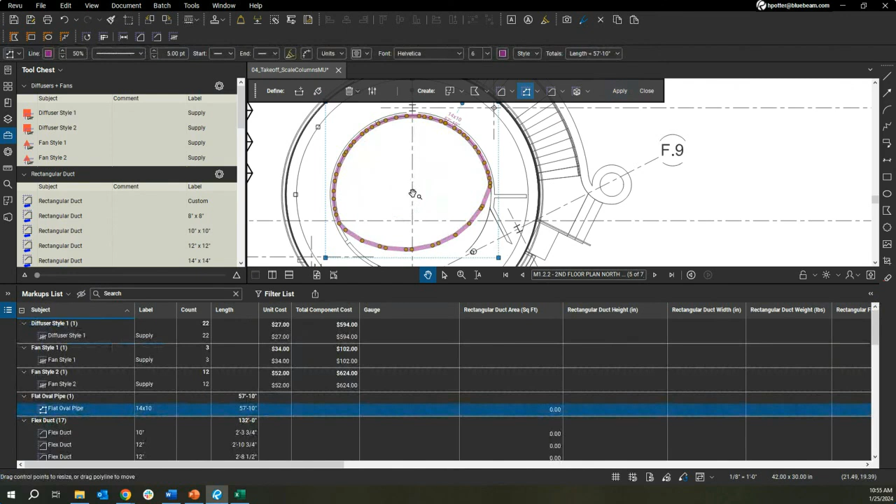Another way is going to be to use our dynamic fill tool. This is a wonderful tool, I won't have time to get into all of the depth here, but it gives me the ability to fill in certain areas. Great for curves and arcs, where I can select the tools that I want, including a poly length tool, and I can also include an area. I can fill in a certain area and get nice curved measurements from that, for an area or a poly or a curved length there.

Excellent, thanks Harry. I was hoping you would mention dynamic fill. If people were wondering how you did that, just Google 'dynamic fill Bluebeam' and instructions will likely pop up in your browser.

If you're hearing a weird noise in my background, it's my smoke alarm going off. But we will move on to another question.

Harry, if you could just take this one: is there a quick way to toggle between metric and imperial measurements?

Yeah, there is. If you select a measurement, or multiple measurements, at the top of your screen there'll be a little units dropdown where the properties you can adjust are shown. If you change the units to metric, you can toggle that there. So each individual measurement can be toggled individually, and you can swap between imperial and metric units on a markup-by-markup item, or select them all and swap them all at once.

Excellent, thanks very much. We'll give you a break and go over to Ash. There was a question here—not sure if this is actually possible myself, but it's a good question: is there a good way to measure lengths that span multiple pages? For example, they've got a receptacle that's connected to a panel a couple of pages over. What's the best way to measure that length?